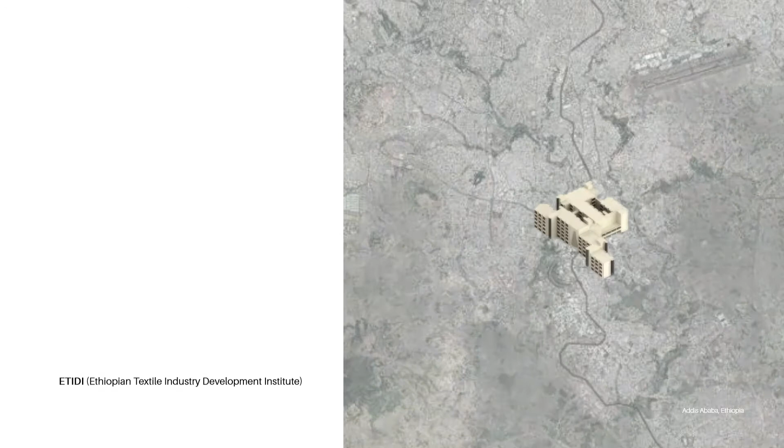Amongst the 5 different sites, Site C is located on the Akaki River in the southern part of Addis Ababa, and the site is home to the state-initiated Ethiopian Textile Industry Development Institute, ETIDI. It seeks to establish a new production model in the garment sector. The question is how future-oriented manufacturing facilities could be implemented on the socially, economically, and sustainable side.

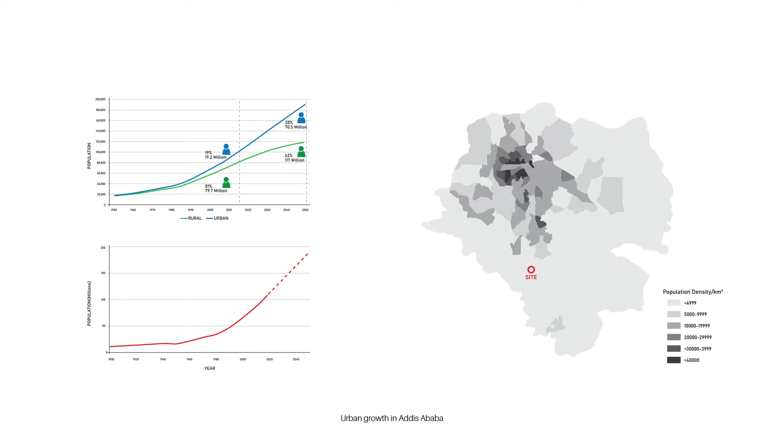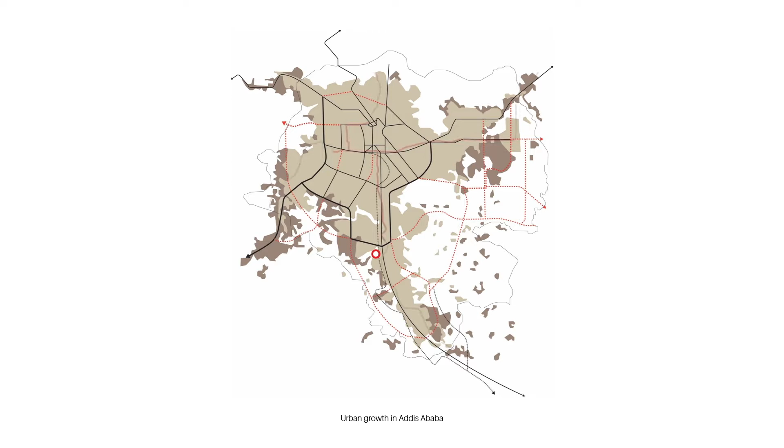When it comes to urban growth in Addis Ababa, the city has rapidly expanded since the 1970s and has been through rapid changes in urban structure. Additionally, the population and density growth illustrate an influx of people into the urban area. With its growing phenomenon, the city has been building infrastructure to connect newly developed area and plan to extend the existing facilities. However, ETIDI has not fully connected to the central infrastructure yet.

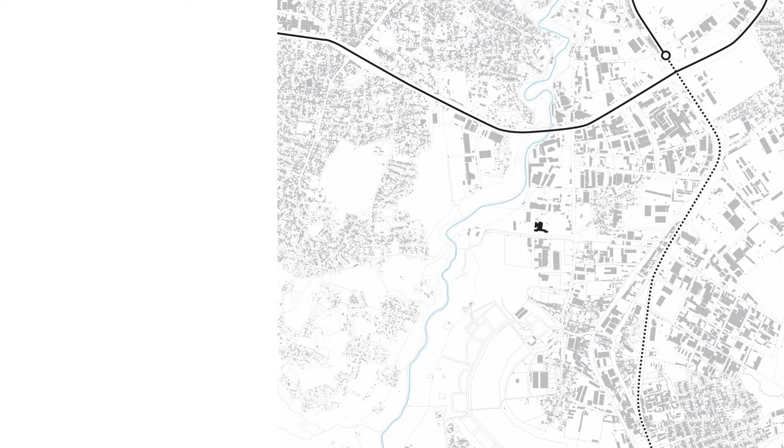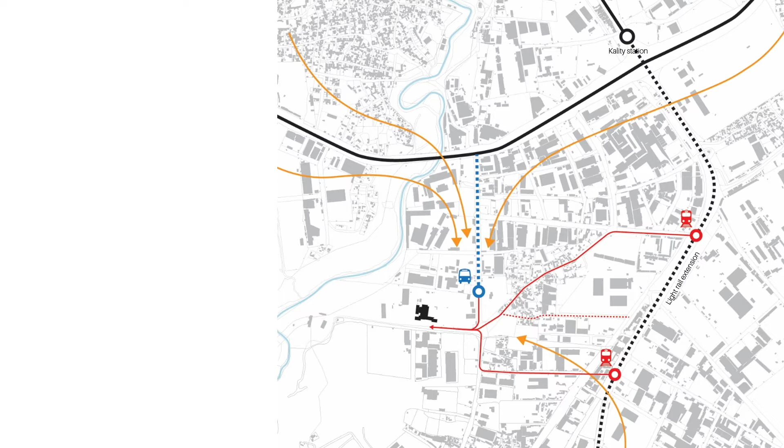To scale down to the site area, ETIDI is in the middle of the industry zone surrounded by residential areas. However, the area has yet to have a specific infrastructure connecting residents to the site. Since people rely on public transportation to access the site, the new bus stop and stations should be introduced based on the extension plan of the light rail which conveys the people.

The goal of ETIDI is to enable the Ethiopian textile industry to be competitive in the global market through investment support, production capacity building, and market support. The textile industry is considered the priority sector by the government's industrial development strategy. The institute provides programs for training, benchmark implementation, laboratory testing and inspection, research and development and marketing training, which show the ambition of the Ethiopian state in the garment industry to become a prime mover globally.

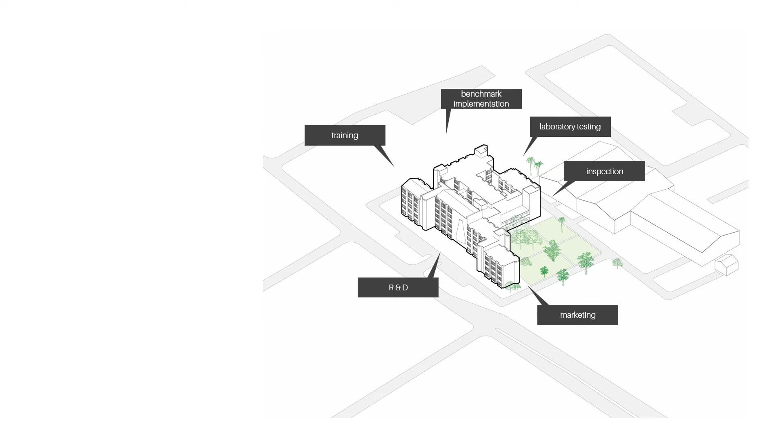Thus, the ETIDI desires to grow and expand its program toward the city and plan for the future extensions. By allowing its extension for growth, the question arises, how can the city and the building grow and expand to prepare the future industry? The main idea established the theme of a growing city, that a building as a city and a city as a building.

The building continues to expand by linking other cities' facilities and embracing the people and their lifestyles as living organisms. Then, how can a city react to this force of growth? And how does architecture respond to this program?

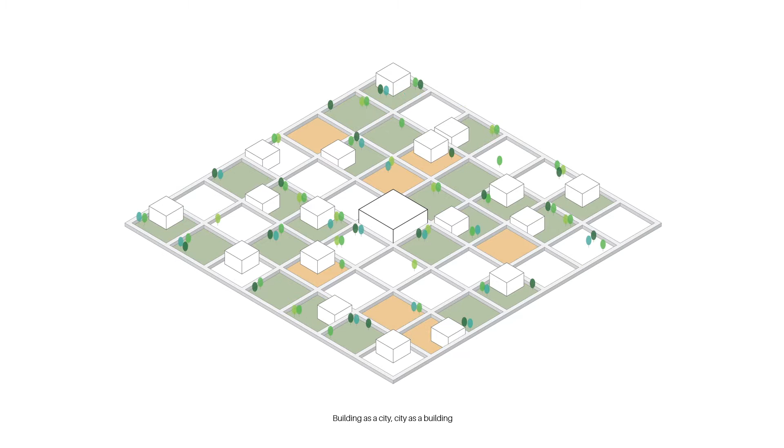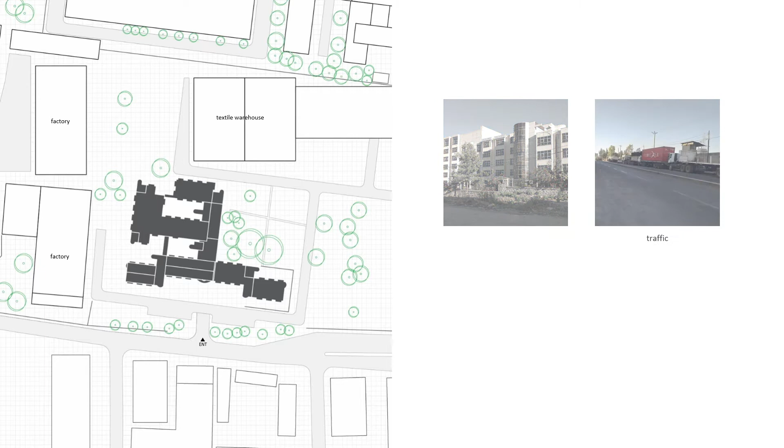Given the current context of building and the surrounding, the ETIDI is an institution encompassed by factories and warehouses. And the fact is that the building itself is not corresponding with the surrounding environment. It stands in the middle of the city with monumental features. The roads are full of heavy trucks which are not pedestrian friendly. The unmanaged vegetation grows arbitrarily around the site, and the river is heavily contaminated by wastewater from the factories.

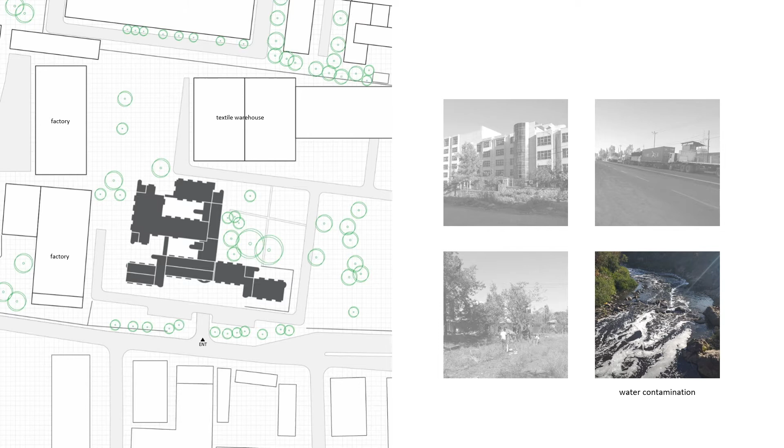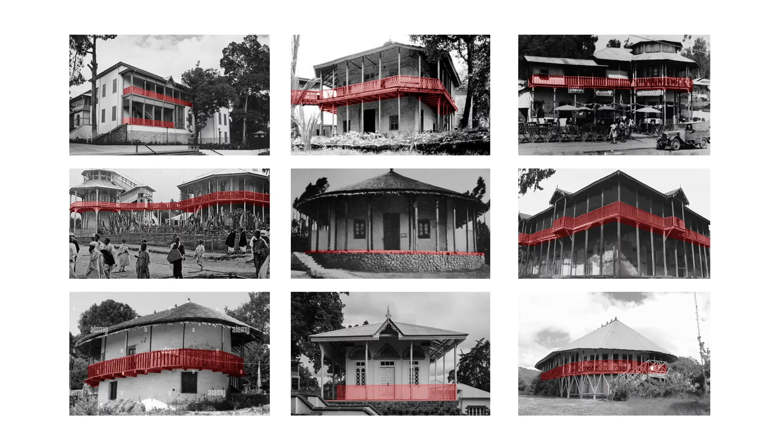The envelope of the building describes its modernistic monument. The site context shows that the building has no relation to the surrounding context, and heavy trucks are passing by with pollution. Thus, the design aims to handle factories and warehouses with the institution, elevate the building's appearance, and manage the site's natural environment. In terms of the historical architecture typology, the buildings have outdoor corridors surrounding their facilities.

It is on the ground floor, and elevated levels connected all the building or rooms. This feature, marked in red, is also in line with the concept of connecting city as a living organism. Therefore, the critical concept of the design is that the path connects every facility and improves the current condition of the city with an elevated track that has cohabitation at both levels.

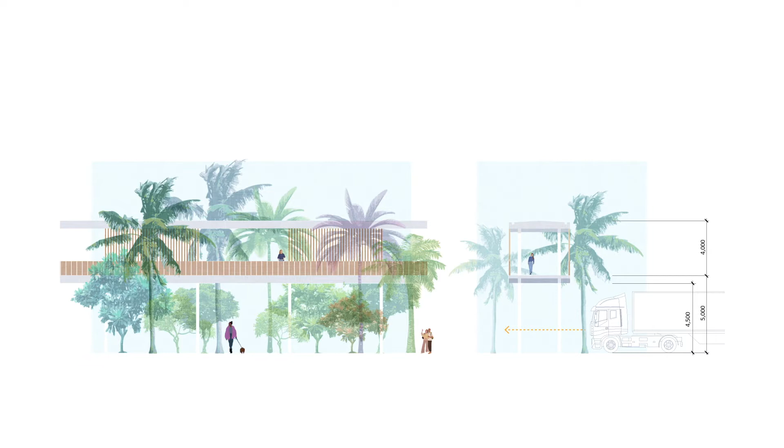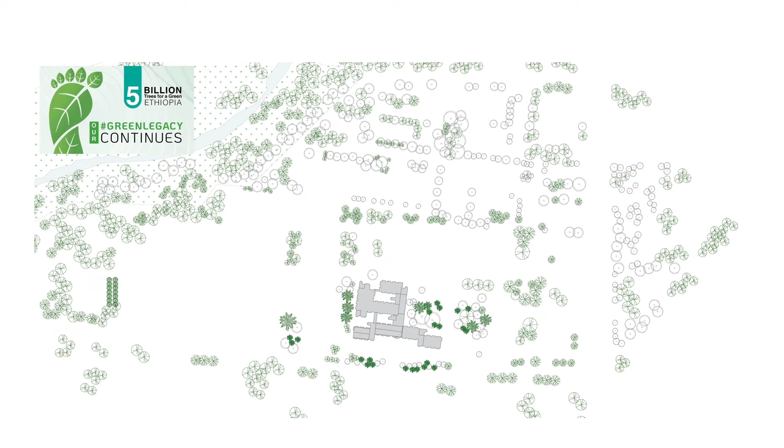The structure secured enough height for the trucks passing by. People can walk through the trees, which creates an eco-friendly outdoor space, and this plantation is supported by the state's campaign called Green Legacy. It pursues planting trees and will help build green space in the area. The conceptual image shows the atmospheric passage in the trees.

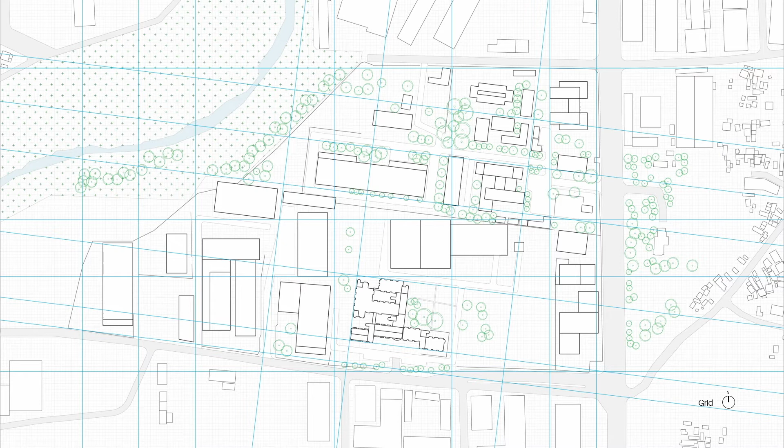Regarding the project's planning, the guideline of grids is created based on the orientations of the existing buildings. This grid forms a new linkage system that connects buildings and embraces the facilities. The path connects programs, and there are many points for the accessibility to this pathway. In between pathways and existing structures, new buildings and programs can be invented, giving a new ground for development and programs that can intervene in the site.

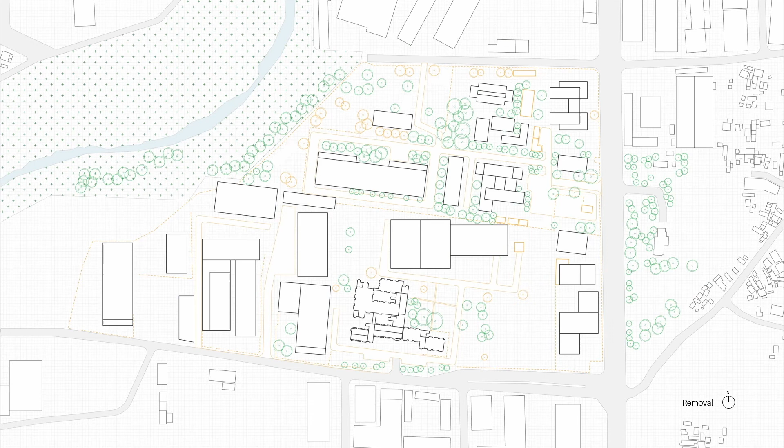Due to an expansion of the program, some parts of existing structure will be removed, although most of the removal is walls, the boundary line between properties and temporary structures. The original circulation system and some trees are replaced.

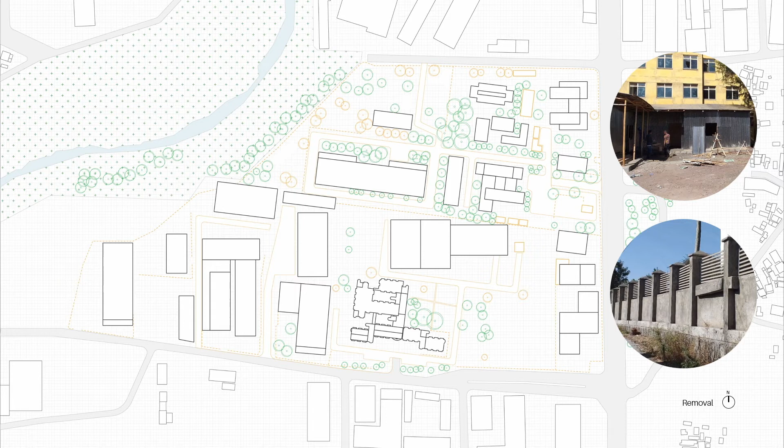Some of the existing programs will transform in response to new developments and expansion of the ETIDI. Most of them are factories or warehouses. They will convert into future-oriented programs such as robotics lab or R&D centers.

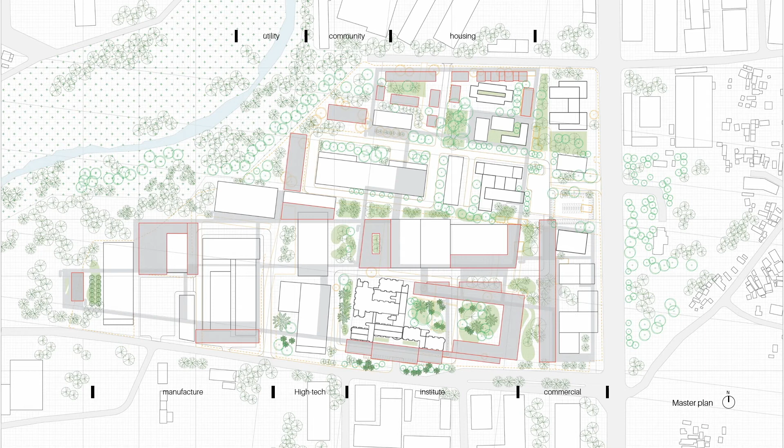The master plan shows program zoning with manufacture, high-tech facilities, and commercials with the institute as a center and housing and community zone on the northern part of the campus. The phasing illustrates the development process over time, showing how the industrial site turns into a green campus.

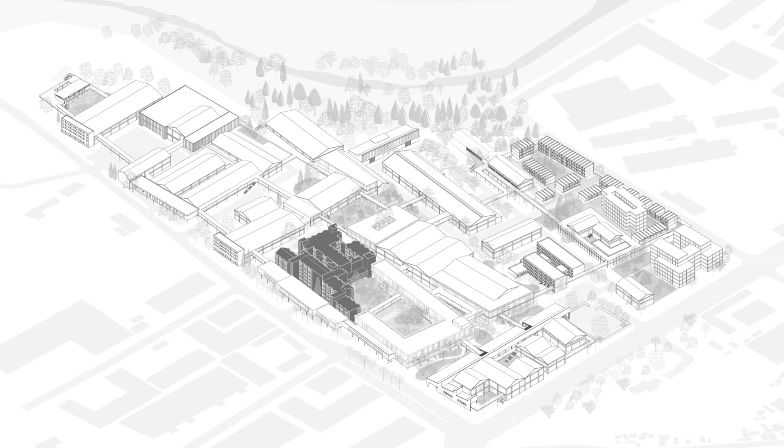To adapt the design to the site, I propose 5 methods of renovation: insertion, juxtaposition, wrapping, weaving, and removing. These design strategies were applied to the site to form an expansion of ETIDI, and these recreation of space give different vibes to the area according to the programs.

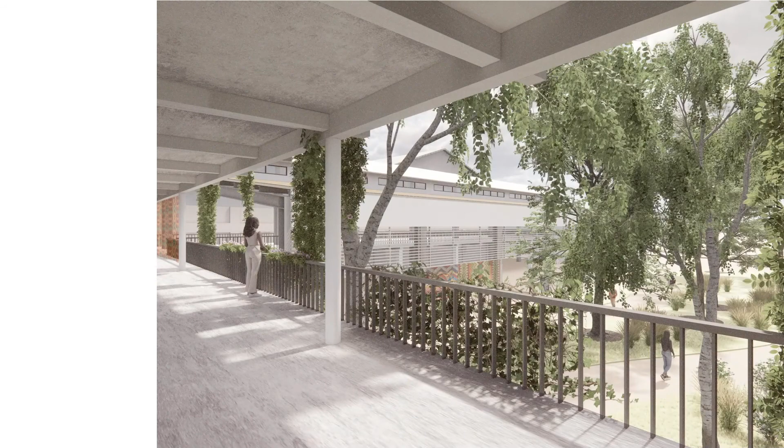I will walk through the spaces, illustrating how new programs transform the industrial site. The elevated path gives peaceful moments with lighting and shade, and it allows the feeling of walking between trees. It also connects different programs on the site.

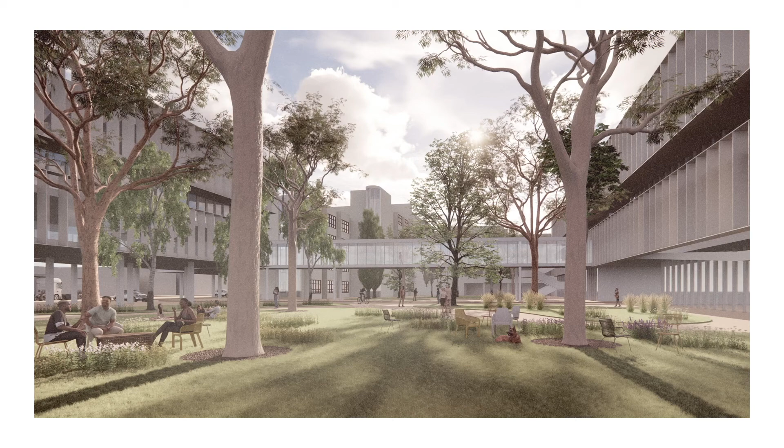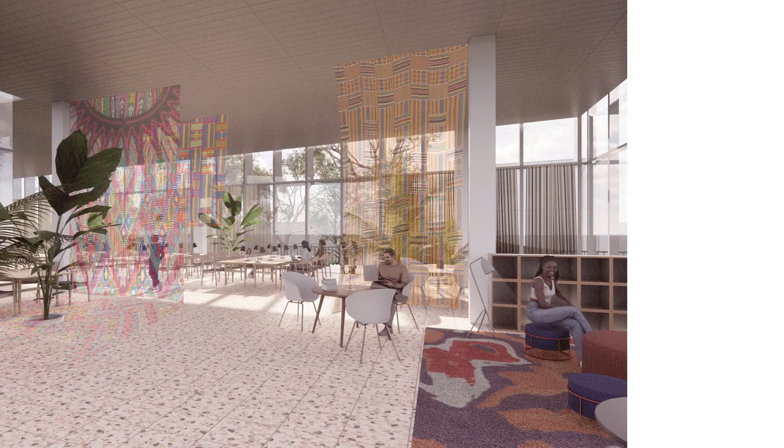The unmanaged courtyard turns into a serene yard with a new institute extension where people enjoy on the ground and above the ground. Library provides a front and courtyard where people gather as a community. The transparent facade blurring boundaries of in and out gives the atmosphere of reading in the trees. Again, the outdoor space represents cohabitation between 2 levels, existing conditions and new structures.

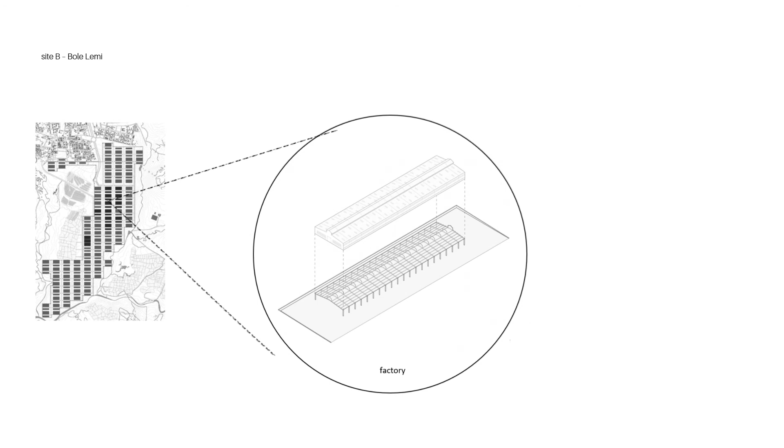The factory from Site B Bole Lemi that reflects the idea of vacating the factories will be implemented and creates a market strip where people continue to have everyday street life that they used to have. And a particular portion of the factory turns into a utility facility as a supporting program that generates factories on the site. Workers and students can find peace in the cafe.

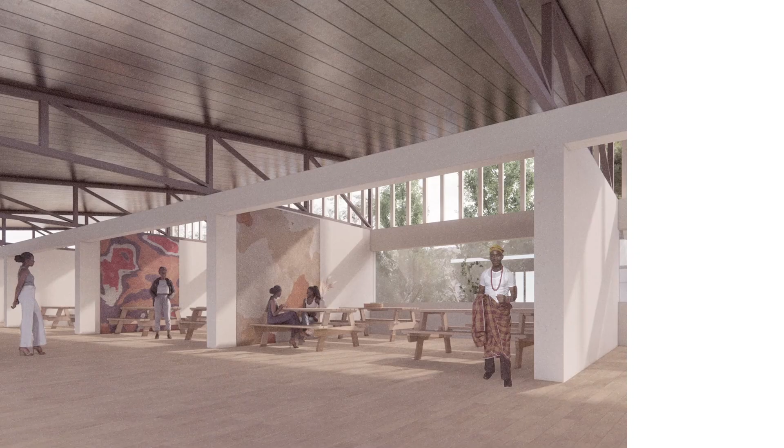Housing provides a cozy place for those who work or study at the ETIDI site and help build communities. The dormitory type is suitable for singles, and families have a larger type of housing since the average household size is 4.6. Newly developed ETIDI creates sustainable environments where daily life experiences are at both levels, and the balance of old and new indicates architectural cohabitation.

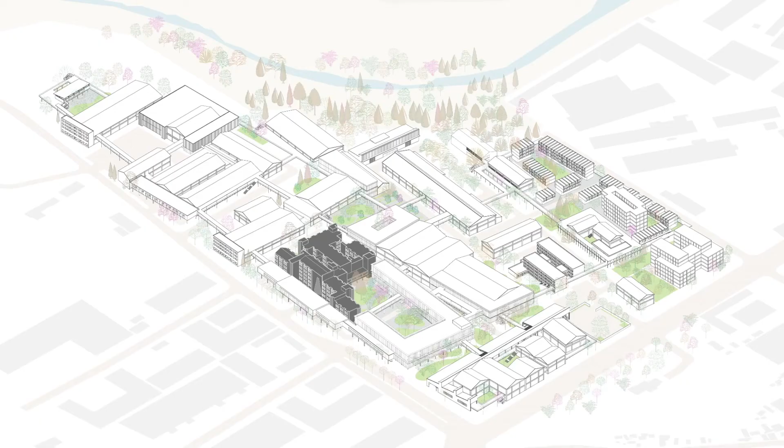This is a vision of the new ETIDI proposing the building weave into the city as a manner of growth. Thank you.